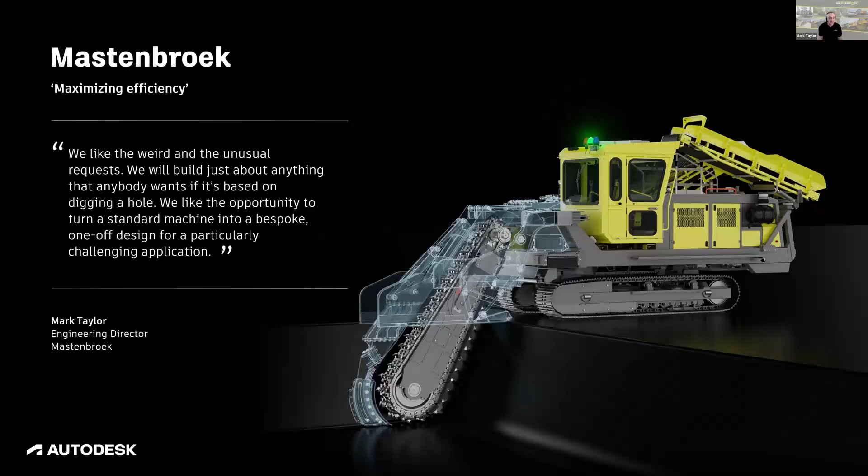I'd like to give you a quick introduction to Mastenbroek as a company. We're a family-owned private business employing about 40 people. All our operations are run from a single UK site. We're currently in our 48th year of trading, and over those 48 years we've produced upwards of 850 machines, many unique, bespoke machines, and sold into 65 countries around the globe. On a personal note, I've been with the company 46 years, and we operate everything from a small factory in a rural part of the UK.

The area is not renowned for engineering, but it has a Dutch sort of heritage - flat, low-lying land that needed drainage. That's where the company originated, when John Mastenbroek came over from Holland to import machines into the UK and help drain the fens, the area where we're based. To start with, he struggled with getting the machines to work, as the ground conditions were slightly different. So that went from an importer to a manufacturer in a very quick space of time.

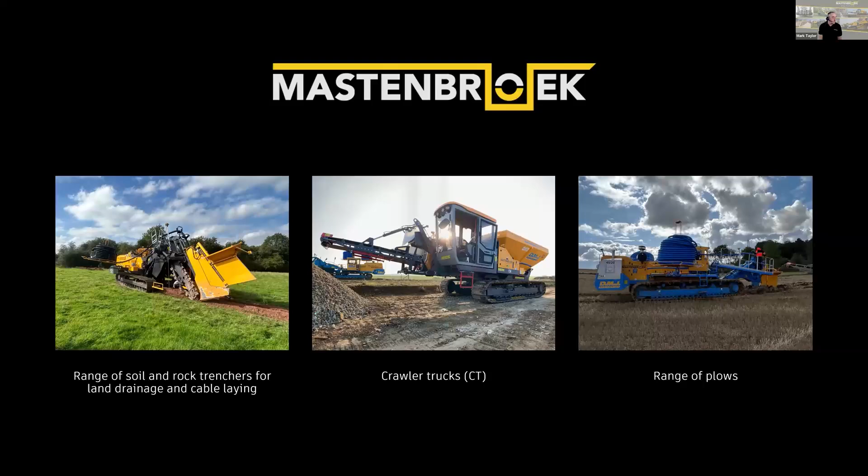This is a recent project which we call the 1717 Bulldog. Mastenbroek is proud to have our machines exported and working well in America. We all know the issues on the West Coast with the frequent deadly fires causing a great deal of grief over there. This 1717 Bulldog was developed from a European style rock trencher, but its unique ability is to work in the confines of the mountains of the West Coast, with steep, narrow, winding roads. It buries a lot of overhead cables and services to protect from wildfires, and also helps by reducing the arcing and sparking seen to be the root cause of some of the fires.

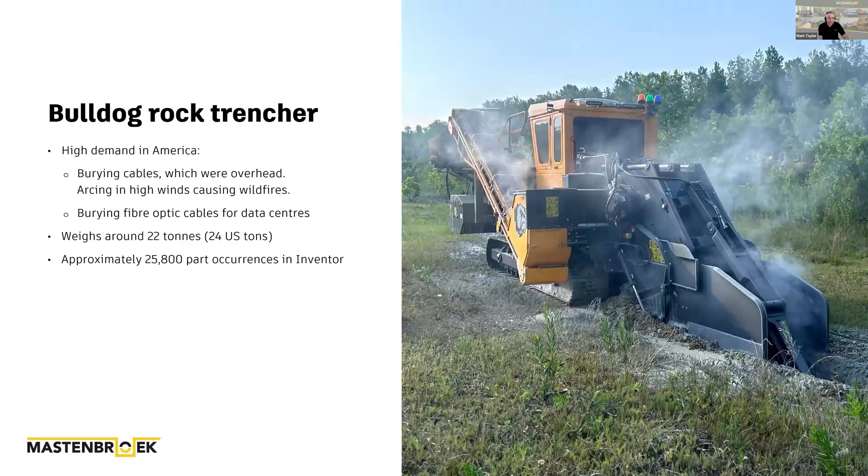Recent projects: dewatering, deep trenching, large dewatering machines that reduce local groundwater tables to aid the building of industrial estates and housing developments; soil stabilisation down to depths of 60 feet, used for water containment on levees and riverbanks to help reduce seasonal surges of water washing the banks away; and ring-fencing landfill sites for the containment of leachate that can then be collected and dealt with, so the environmental impact is managed and reduced.

We have lots of challenges with the development of these machines - some are very small, some are very large. On this particular project, transportation of the machine was critical, so we had to make the machine modular for disassembly, so the whole machine is in transportable loads, while still maintaining all the strength of a trencher capable of trenching down to 60 feet.

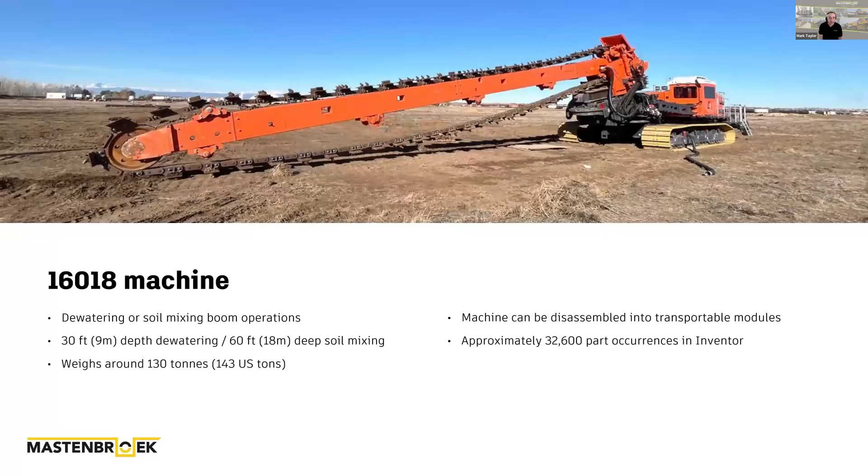Another recent project, we get heavily involved in the Subsea department, which in principle is the burying of offshore cables for wind farms.

We're often commissioned to be involved in projects that require existing designs to be redeveloped. This subsea project started life burying large subsea gas pipelines. We were asked to aid in the transformation to turn that style of machine into one that is more current.

As in the burying of electrical cables for wind farm projects all around the UK. What we can bring to these projects is near on 50 years and thousands of man hours of experience that we have in burying these style of products. No matter where that trench needs to be cut, we are capable of coming up with a technology that allows us to effortlessly transform any machine into what we want it to do. For us, being able to bring that to the table is crucial for the growth of Mastenbroeks.

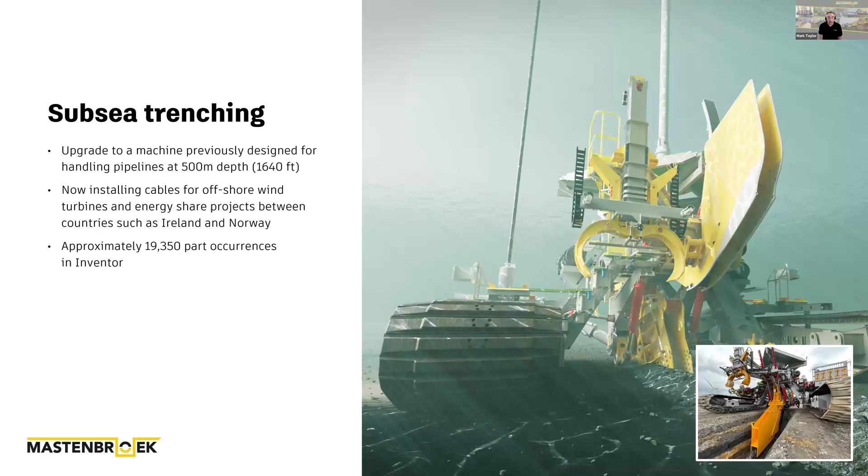Okay, so we're going to talk a little bit about common challenges that we have here. Roughly speaking, we sort of split our challenges into design and manufacturing, but of course they're all linked by the software that we use.

First and foremost, it's important to understand that our machines are not road-going vehicles, so they have to be transported between sites. Whether we choose to design our vehicles as a complete machine or as modules that can be disassembled and reassembled on site, we're limited in footprint by transport legislation. And that footprint doesn't really change over the years. So our biggest challenge is usually packaging.

We tend to pack more into a machine these days, but the machine footprint doesn't get any bigger. A good example of that you can see on the screen there is one of our engine modules.

As engine emission standards tighten up, we've had to adapt for a more complex exhaust system. Where we used to only fit one can, we can now fit two. There's usually extra pipe work, which all has to be run at controlled angles and lengths.

We need to wrap those exhaust pipes to control temperatures. There's a whole array of sensors, and we have to find room for an additional tank for AdBlue. So that all sort of takes up extra space. The knock-on effects of fitting more in is obviously reduced access for maintenance, and increased labour for fabrication and assembly. There's other design challenges too.

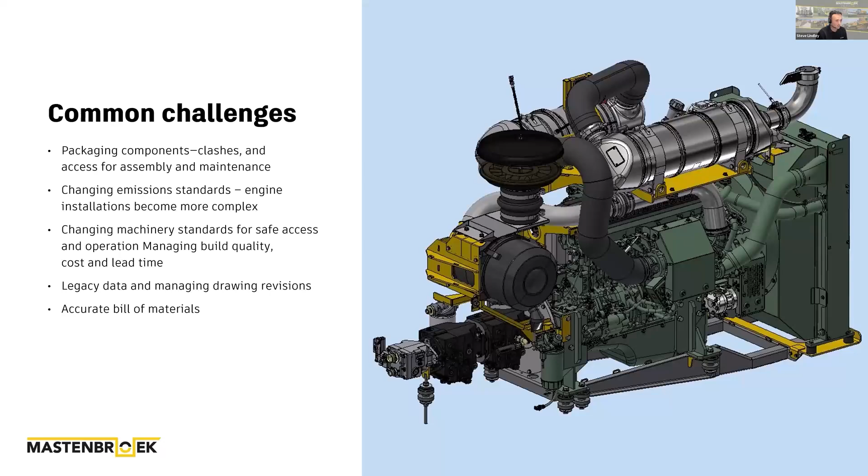From a manufacturing point of view, we face similar challenges to everybody else. We're trying to be efficient in all our processes, whether that's managing files and legacy designs, ensuring an accurate bill of materials, striving for high build quality, lowering our costs, and managing the build time.

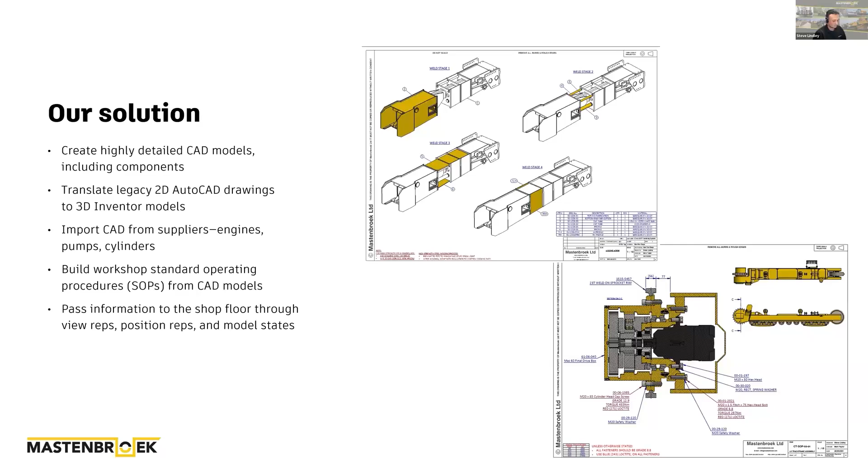To help with our processes, we do utilize the model. Our iProperties, for example, we load up with part numbers and descriptions, and of course parts lists to get the assembly quantities to ensure our bill of materials are accurate. That's fundamental to ensuring everything goes smoothly once it leaves the design office.

We're able to translate our CAD model parts lists into spreadsheets where they can be edited or imported into our ERP software, and we can filter that spreadsheet, track the parts, and sort it by process or status. Finally, we have a dedicated design engineer who creates exploded views for parts books, which are supplied with each and every machine. This helps with after sales care and maintenance engineers as well.

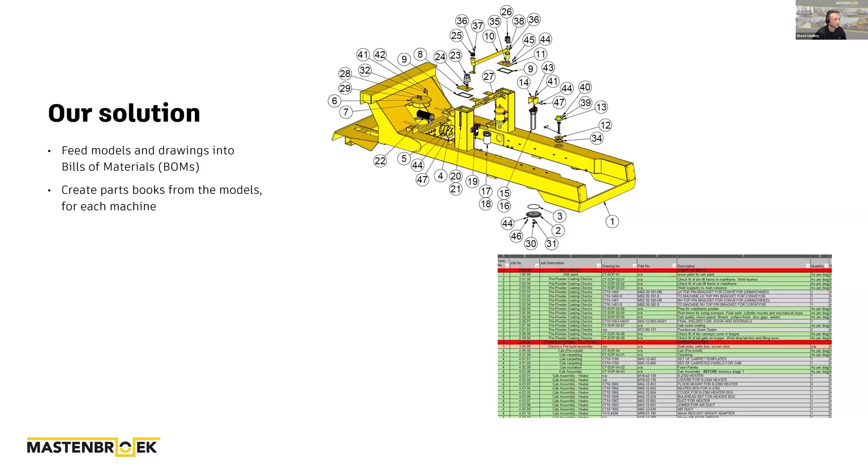Next slide, please. Thank you. So we do a little FEA here.

We find that FEA tends to be useful for us on bespoke designs rather than on the standard machines. Mastenbroek has a reputation for longevity and robustness in our designs, so analysis can help ensure we continue that trend. We tend to use it for analysing areas of concern or proving concepts to customers.

What we don't do is manufacture in any great quantity. We're not making thousands of machines every year, so that doesn't really help us with FEA. We don't use it to save a little material on thousands of parts to save cost, and we don't need FEA to help us reduce weight either. Weight can actually be useful on the trenchers.

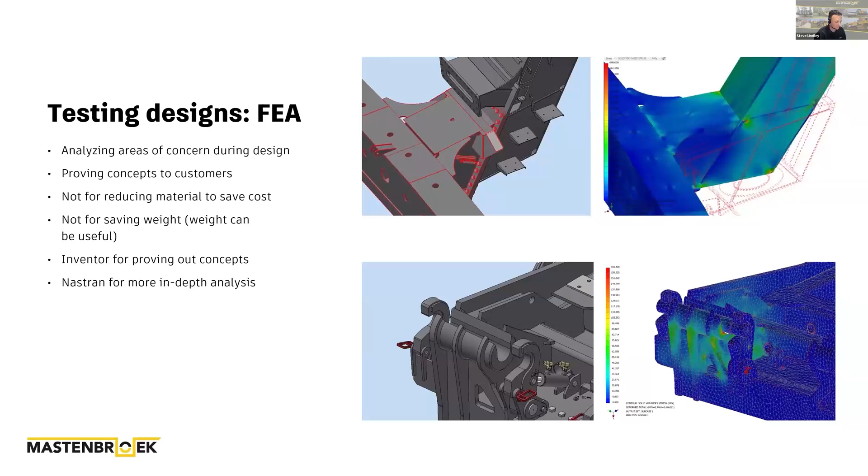We tend to use Inventor's own stress analysis for most of our results, but on a couple of more recent bespoke machines we have used Nastran for a more detailed analysis.

As I mentioned earlier, the CAD data's no good unless we can communicate, and we feel it's important to use that CAD data and the software to its maximum potential, not just in manufacture, but in sales and marketing too.

You've got to ask yourselves a few questions, like how do we prove to the customer that we meet their specification? We need to clarify transport sizes to help them manage their logistics. We need to show how their chosen options fit on the machine, and the range of articulation of linkages and tooling so they can consider any operational restrictions. And how do we reassure customers that our bespoke designs are functional, robust, and value for money?

How do we provide the right level of communication for the right type of customer? Some of our customers are long-standing with a deep understanding of the machines and their operation. Some are experienced technical managers but perhaps not familiar with Mastenbroek designs. Some are new to the industry and need far more support and information. So how do we get swift approval for our designs so we can meet our designated build slots?

There are a lot of tools in Inventor we can make use of. More recently, we started to make good use of shared views, which I know Jim touched on earlier. We find them very quick and easy to use, and our customers find them very easy to use too. They're best for customers with greater technical understanding, the guys who you're happy for to pull the model apart and really go into detail on.

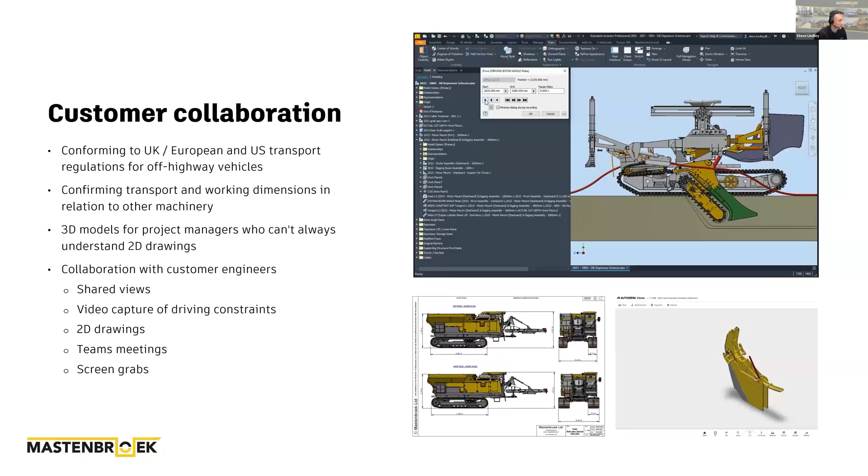So a lot of our marketing has explained that we have very large CAD models. This is a little bit about how we work with large assemblies. I touched on why we have such large assemblies, but there's a lot more benefits.

Having an accurate mass in our assemblies helps with engineering calculations or planning for safe handling. It ensures we have sufficient detail for accurate manufacture, which improves the end quality of the machines. To avoid slow performance or crashes, how we structure our models helps a lot, and we generally try to follow best practice where we can.

We have a decent spec of desktop PCs for each user. But what helps most, I think, is making good use of sub-assemblies at the top level.

For our CAD data in general, we have a reasonably flat folder structure, which groups files mainly by machine type or into common libraries such as hydraulic components.

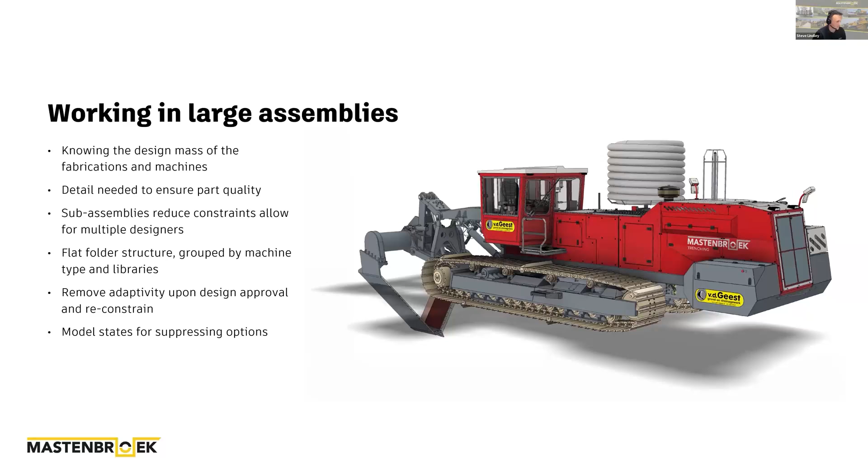We make good use of model states too for suppressing options, such as different lengths of digging booms or pipe boxes that come with one machine. And we generally try to quickly resolve constraint issues and interferences, which just helps Inventor process the views a bit easier.

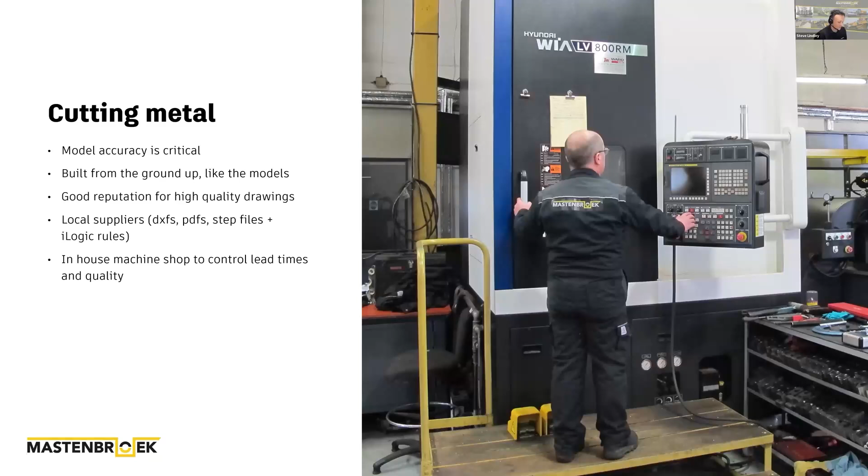So cutting metal, we don't have a massive amount of time for any single project. We go from a blank screen to cutting metal in a matter of days, and the machine is rolling out of the door in 12 to 16 weeks.

In ideal circumstances, we would wait until the design is complete before releasing drawings from the design office. But with thousands of parts to process, we release as much as possible, as quickly as possible.

So we break the machine BOMs down into phases and start with phase one, which is always the undercarriage, because we physically build the machine from the ground up. And our models tend to try and reflect that build process.

So the phases help us by allowing us to release the phases that we don't need to do any design on. And it buys us time for working on the design of the phases that do need it, and it helps us prioritize our design work too.

We have a good reputation with our suppliers for high quality drawings because we believe the level of detail in the models and the information on our drawings must be high, to reduce the risk of manufacturing mistakes that arise from making assumptions. We have a small design team, which means it's easy to be consistent in our approach and to share our learning.

And we can be flexible in changing our drawing standards if an improvement is identified. We have an ever-growing library of sketch symbols to record information that can be inserted into the relevant drawings, generally notes relating to particular materials or processes.

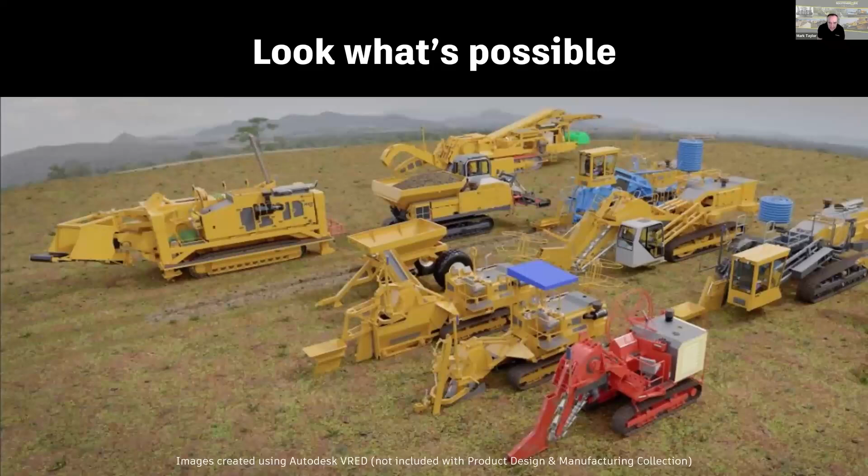Look what's possible. At Mastenbroek, we more often than not take for granted what we do, and it's not until we pass our models over to Autodesk that we can actually see what it can create.

It can create an awfully good sales tool. We used to sell machines to people that owned companies and drivers, and you would lay a flat 2D blueprint out on a table and everybody understood what they were looking at. Those days have gone now. You're talking to government departments, boards that have been set up for drainage, and they're not very capable of understanding flat drawings.

When you bring in that third dimension, what that allows them to do is to see that depth and get a feel for a machine and what it looks like. It's become a very, very powerful sales tool to showcase what we can do.

And we use it to design and develop new conceptual ideas. Not only do we design the conceptual stuff, what it allows us to do is put that in front of the customer and say, look, this email or these few words on a review, this is what this is going to turn out into. This is what it's going to look like. This is what it's going to work like.